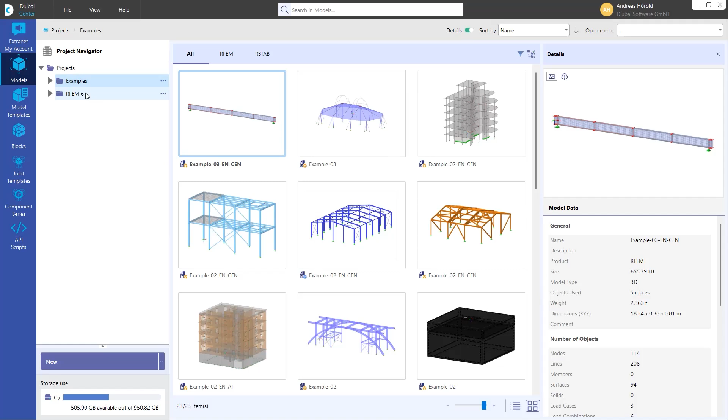Okay, let's start with the first question: how do I organize my projects? I can organize my projects in the Dlubal Center. People who already work with RFEM 6 know that. I would like to give you some tips and an overview of how you can work with the Dlubal Center, and news about what we've implemented in the Dlubal Center.

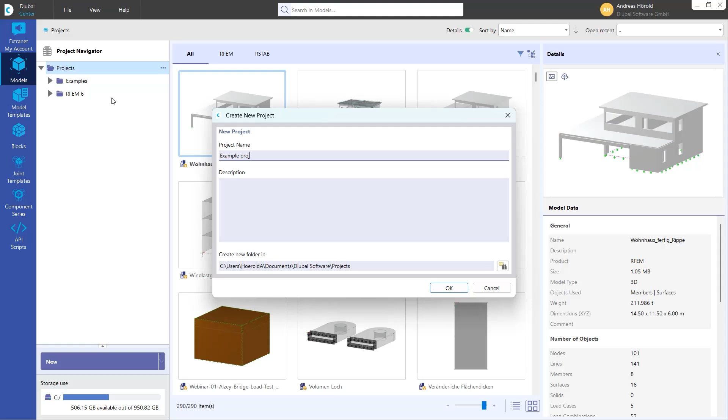Let's start with the models, the most important tool in the Dlubal Center to organize your projects. Let's create a new project with a right-click to Projects. I can create a new project, let's call it Example Project. Okay, that's the new project.

I would like to create a sub-project. Again, right-click to Example Project, then create new project, and the new project should be called Model House 1. I can add a description here if I want. Then, again a right-click to Model House, and I create a new file, RFEM model in that case, and I call it House Variant 1.

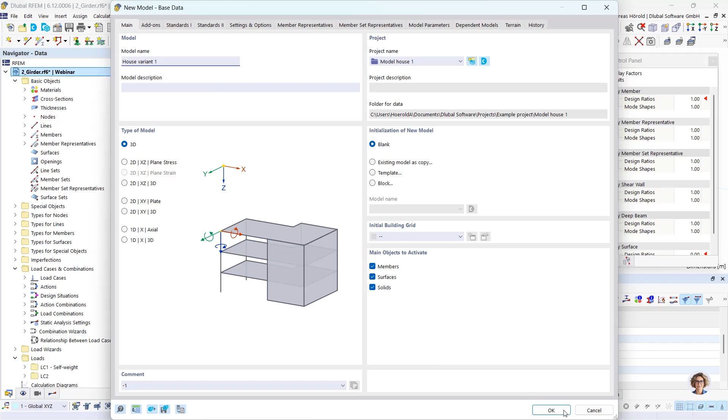Turn back to the Dlubal Center, then you can see the file here. If you switch to the list view, you can add different columns here, for example created in version, created by user, or I can remove them with a double click, and can add used add-ons, modified by company, or created by company, as you want. Different types are available. Now you can see the added columns here.

I can open, for example for the Example Project, with a right click the folder location, and the Windows Explorer was opened. I can create a new folder also here, so with a right click, new folder, and I call it Model House 2. I'll decrease it a little bit so we can see both.

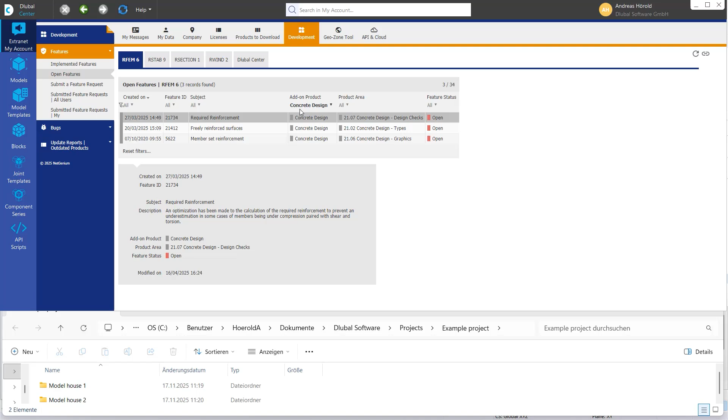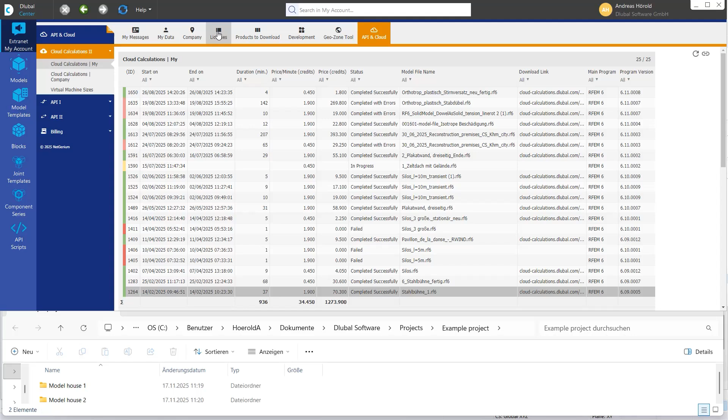Let's turn to the Extranet and My Account. You can see the extranet messages here, or what's quite important, the development - you can see implemented features in a certain add-on, for example, or select all to see all implemented features. You can see open features for certain products or all products, then submit a feature request which may be implemented in the future. You can see the GeoZone tool requests - those are my requests in the past - then the API and cloud, calculations from my side from the past. Then you can see here the data of you and of the company, your licenses, and so on.

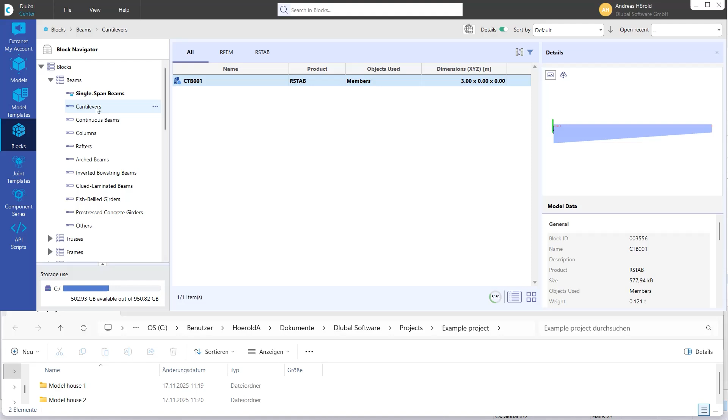Then we turn to models and templates. The model templates category in the Dlubal Center provides an overview of the models you've saved as template files - in my case it's empty. An important note: the Save as Template function in the File menu in RFEM allows you to save your current model as a template. Then you can see the blocks - those are parameterized, and most of the models have parameters implemented. Let's go to this view, the tiles.

Simple models and more complex models, for example curved surfaces and concrete structures - a lot of blocks are available. Just use them, that's quite easy to handle.

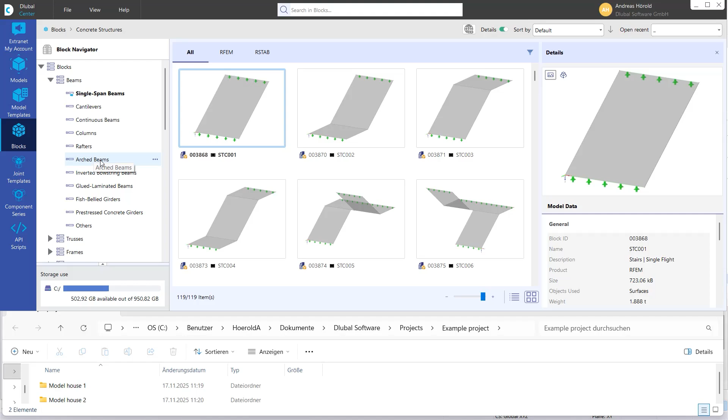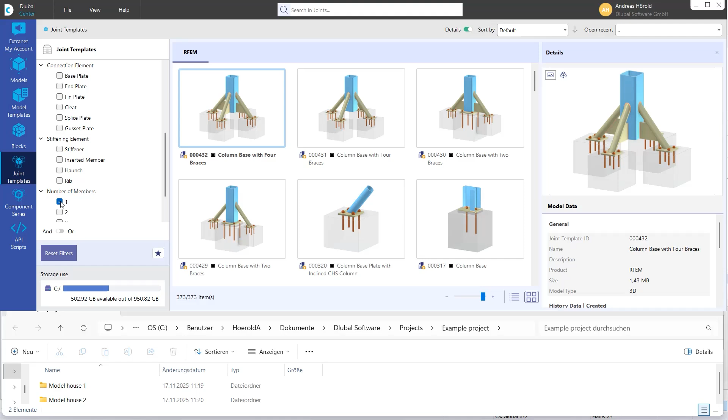Then the joint templates - you can select certain templates of joints. You can use it in the add-on, also in the steel joints add-on, for example also number of members, or joints with ribs, cleat, and so on.

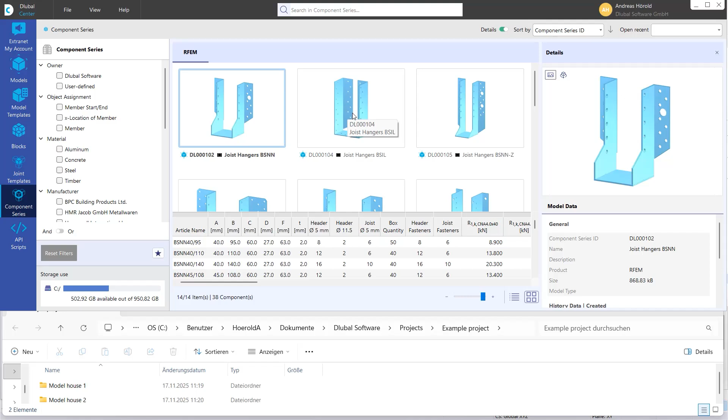Then that's a quite new part of the Dlubal Center, the component series. We are in development of the new add-on components. It's currently in alpha version, meaning it's in preparation, and in the future you can compare your internal forces with the maximum forces of the joint. And API scripts - there are already sample scripts that you can use for your project.

Okay, that should be all for this question. Let's turn back to RFEM.

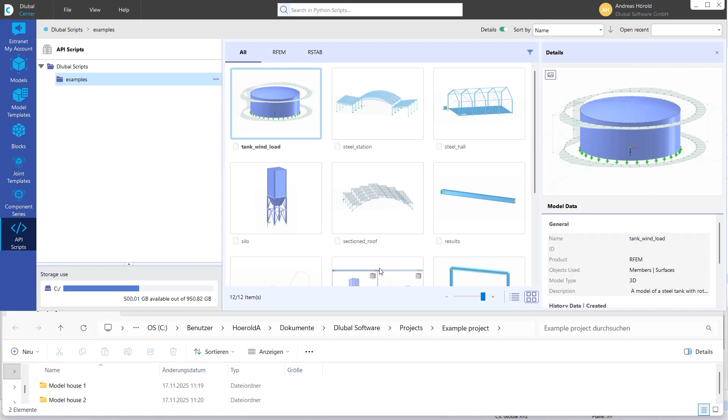The next question is, can I design longitudinal fillet welds according to Eurocode 3, Part 1-8 in RFEM 6? Yes, that's possible now. We'll soon release that feature, and I can show you how to do that.

I've prepared a simple single span beam made of a cross section HE 180A. Imagine you need to use a girder with a maximum height of 175 millimeters. It's not possible, as you can see on the design ratio, with the HE 180A, and it's also not possible with an HE 180B. That's why we create a welded cross section.

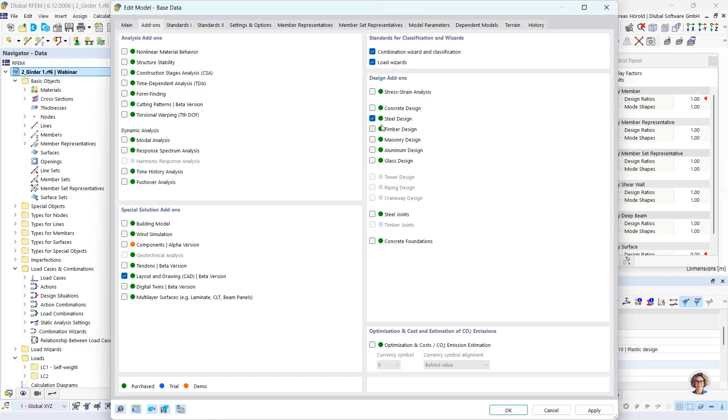At first, it's clear - I go back to the base data. It's necessary to activate the steel design for that feature. Then we create the welded section. I edit this used section. I turn to the library above and select thin-walled I section. Before I enter the geometry, I go back to the main section here and select welded.

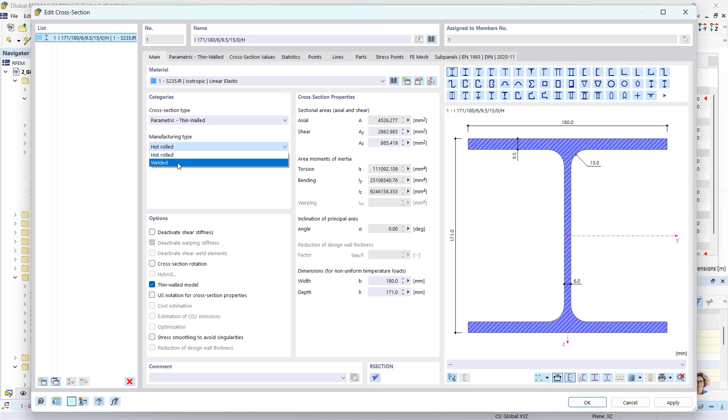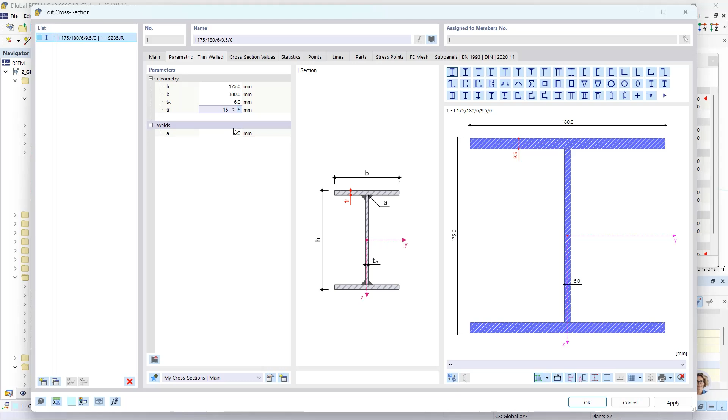Okay, then I enter the parameters. Maximum height should be 175 millimeters. Then the other values can remain, but not the thickness of the flange - should be 15 millimeters, and the weld should be 3 millimeters.

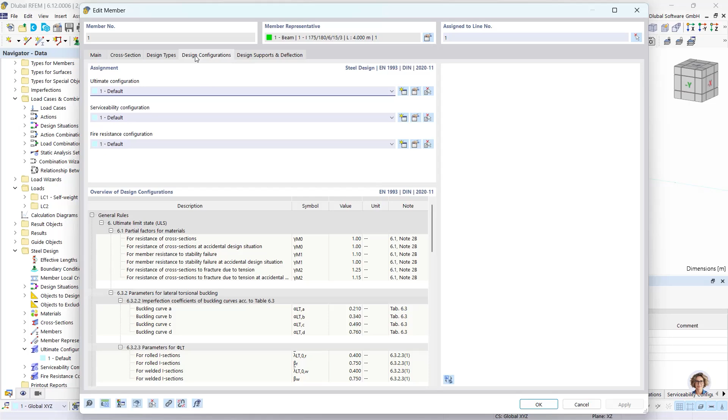Then I have to activate the weld design. I turn to the navigator data, then steel design and the ultimate configurations default. I can turn to that chapter also when I use a double click on the beam. Then the design properties are activated and I can find the design configuration here, and I can edit it also with that button.

So then I have to activate the design of the longitudinal fillet welds. The correlation factor should be determined according to the Eurocode. It's dependent on the material, and in our case it should be 0.8 because we have material S235. If you want, you can also use a user-defined correlation factor, but in most cases we will use the automatic data determination according to Eurocode.

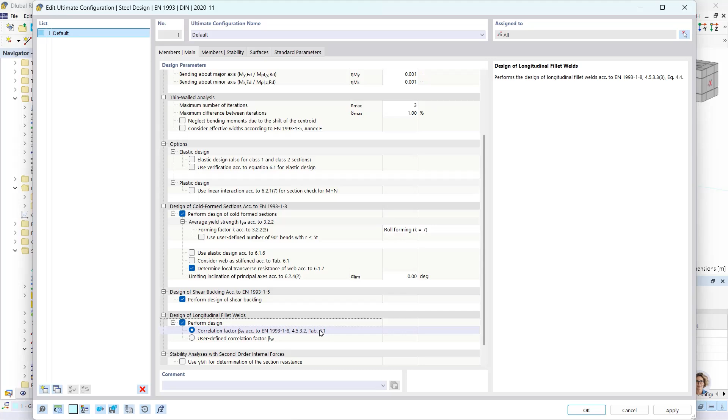Okay, so then I start the steel design again. So the combinations are calculated in parallel. Let's turn to the design ratios on members. Yeah, and you can see there's an error.

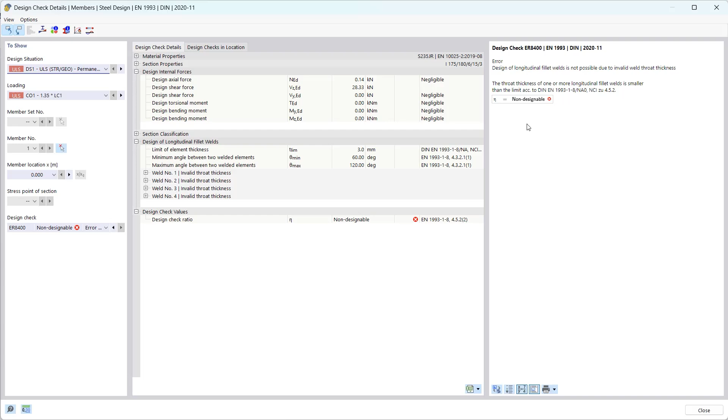If I double click on the line, the details are opened and you can see the throat thickness of one or more longitudinal fillet welds is smaller than the limit according to Eurocode 3. Now the program checks that automatically. In that case, the weld is too small, and we need to increase the weld.

So I turn back to the navigator data and I do a double click on the cross section and I increase the weld to 4 millimeters. Okay, then I run the steel design again.

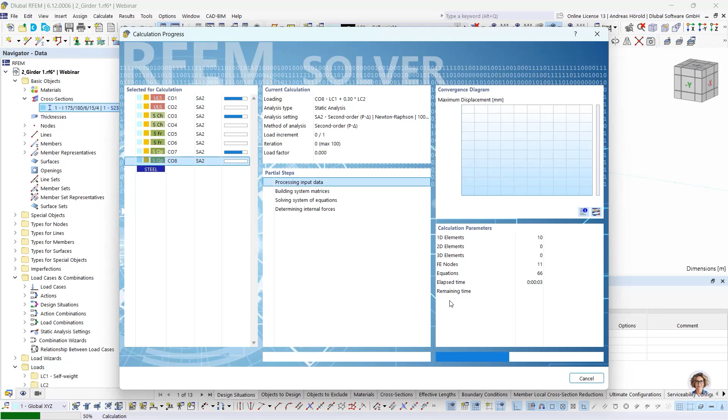So now the design of the weld is done. Double click on it and I can see the design checks - the 0.8 can be found here, the correlation factor, then the thickness of the weld, and the design check ratio is approximately 30%.

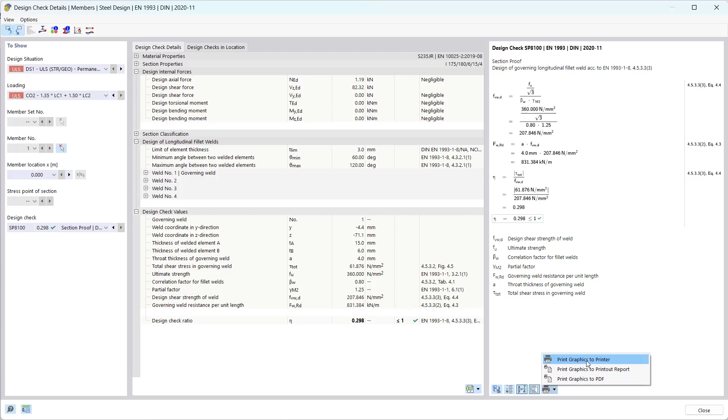And of course, you can also print the formulas and so on, on the printer or in the printout report. Okay, that should be all for this question and this model.

The next question is, how can I smooth results in RFEM 6? That's an often asked question. You can do that with a surface results adjustment.

In RFEM 5, we called it average region. Such a surface results adjustment describes an area in the model whose graphical results are not represented by the actual diagrams, but as mean values. You can use a user-defined adjustment area to evaluate the smoothed surface internal forces.

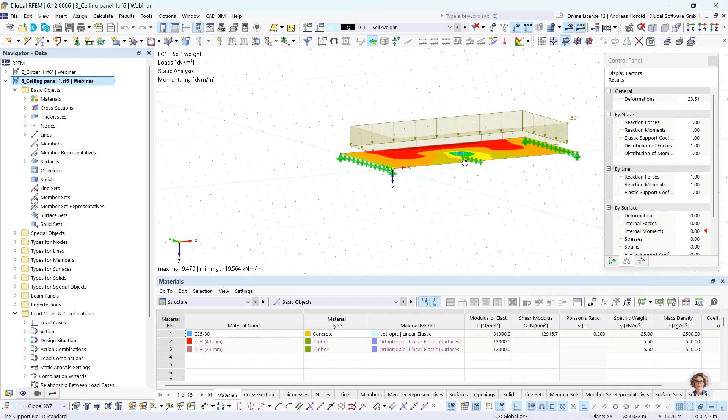You can see that ceiling panel here and a wall here. Imagine it has a thickness of 20 centimeters. And you can see there are singularities at the end of the wall here. So we would like to use such a surface results adjustment to smooth the results.

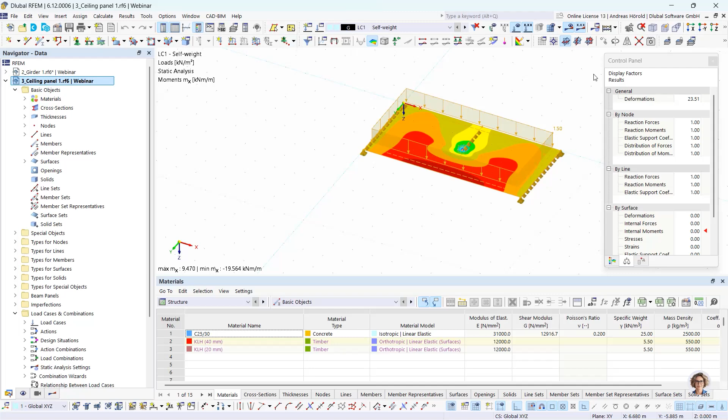So to compare the results, I copy that ceiling panel - select all, then I use the move and copy function, create a copy, 6 meters in Y direction, including loading. Okay.

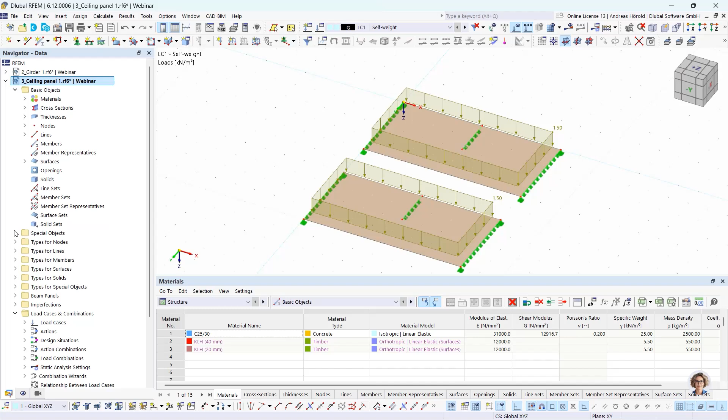So then I turn to the navigator data, and under special objects, you can find the surface results adjustment. You can also find it in the menu under insert, special objects, surface results adjustments, and I open the dialog box.

At first, I have to assign a surface. Then you can select different shapes here: rectangle, circle, ellipse, and polygon. I use rectangle. The dimensions in our case should be 20 by 20 centimeters. And I select the node. To define the position correctly, I move it to 10 centimeters to depict the wall end correctly. Then there are different adjustment types.

The default setting is for the direction u, averaging of my, mxy, and so on, for basic internal forces in surface direction y. The second line here is the default setting for basic internal forces in surface direction x.

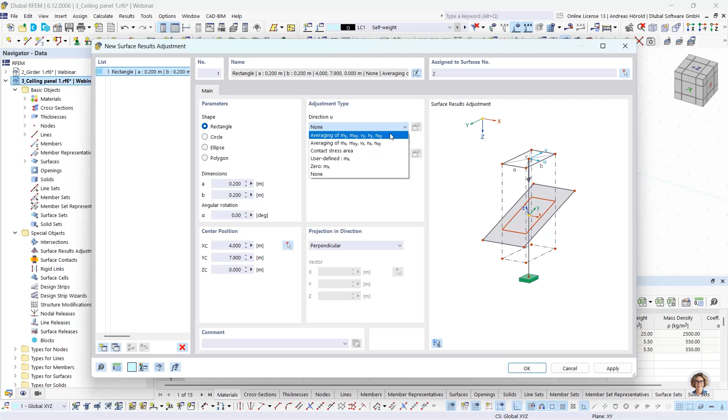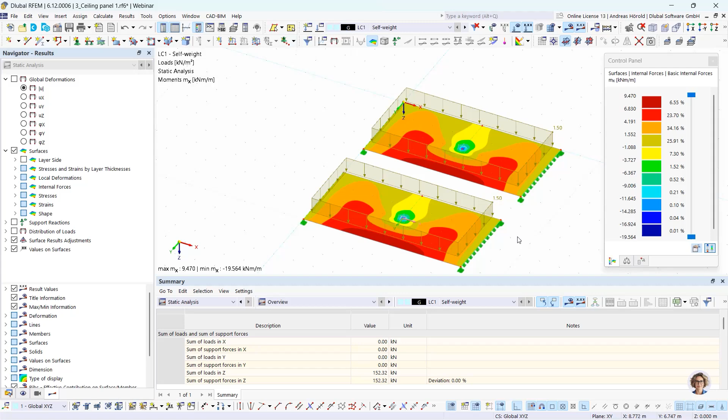If I want to see what the maximum value is here, I can deselect that slab and hide selected objects. Now the maximum value is minus 16. That's the possibility to smooth results in RFEM 6.

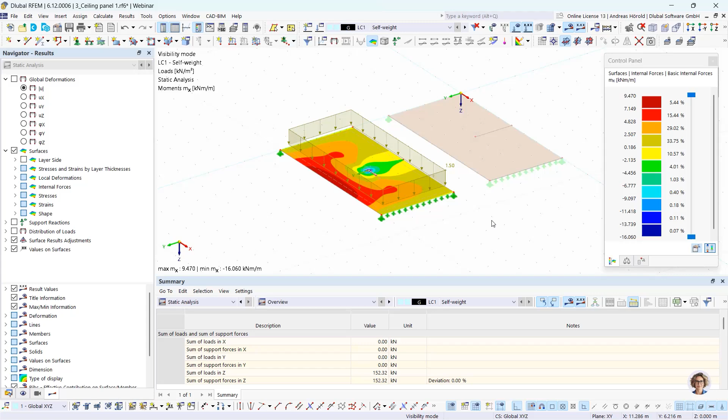The next question is, where can I find specific wind settings in RFEM 6.12 and later? As you have maybe already realized, we changed the GUI in RFEM 6 a bit to be able to hand over more data to RWIND with the GUI in RFEM 6 without stepping directly into RWIND. Let's start with the basics.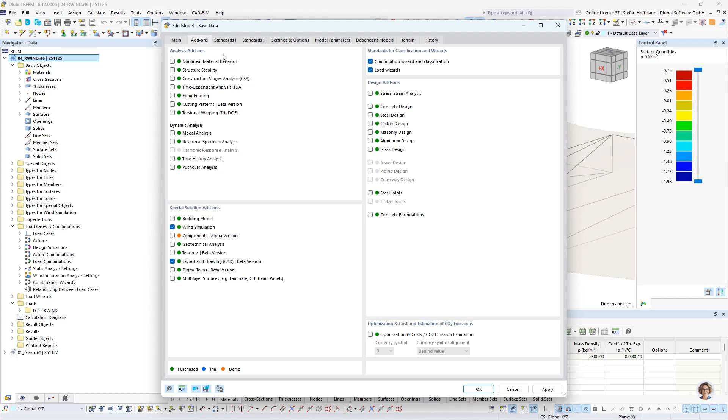Usually at first you activate the add-on wind simulation, and you can choose the standard group for your wind profile in order to determine your automatic wind profile for your region.

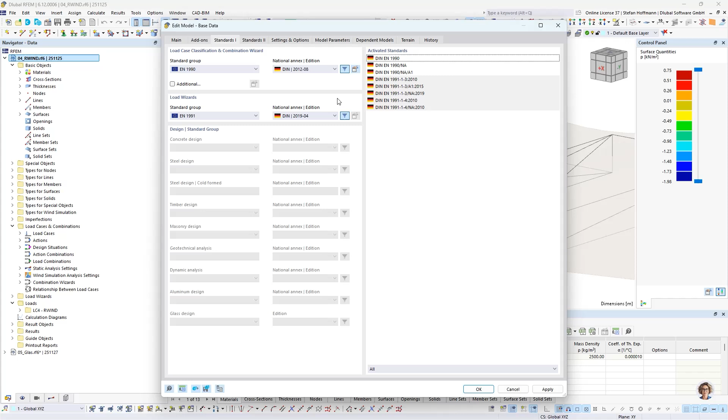If you're already interested in adding a terrain to represent your location specific behavior of the wind, maybe by trees or some mountains, you can already activate a terrain in the base data terrain settings. You can choose between no terrain, a horizontal plane, an inclined plane, some table values, or, as I am using, and this is most likely also the first change, an IFC file model objects.

So this is no more found in the mesh settings to adjust the IFC as a terrain. You already input it as the base data in the tab of terrain. So I'm simply using an IFC file where I've modeled a simple shape of my terrain, and you can do some more inputs on the size of your terrain already here.

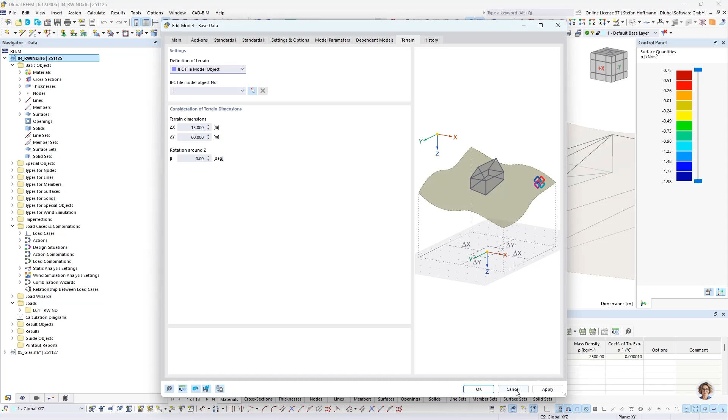So if we jump into the model, you already know that in the mesh settings you have a tab of wind simulation, and for the regular customers, you'll already realize that this tab has changed a lot from the GUI. We moved some parts, and you now have the option to assign objects from shrink wrapping. So the shrink wrapping mesh, which is later necessary for the calculation in RWIND, in order to be assigned to your main structure or surrounding objects. So you can already split it over here, but later on also in the objects.

This is currently not in use. You can as well choose to activate the terrain, which we set in the base data to be considered for the calculation. You can also jump into the base data. You can, moreover, as already known, adjust the level of details for your members. You can choose to close hollow sections. You can consider a surface thickness in general already, and the two known options to keep RWIND results if the mesh is deleted, and/or to run RWIND in silent mode.

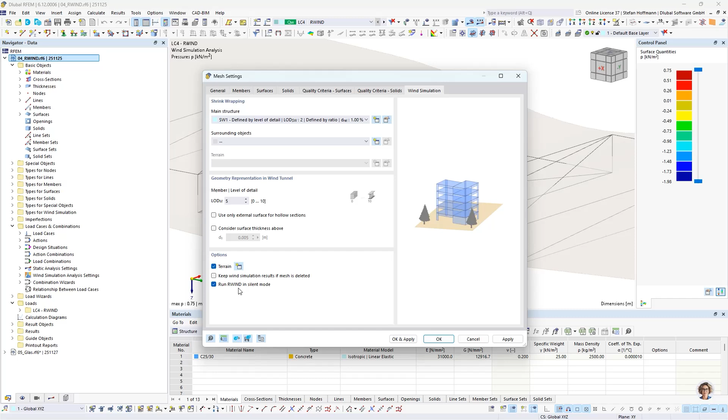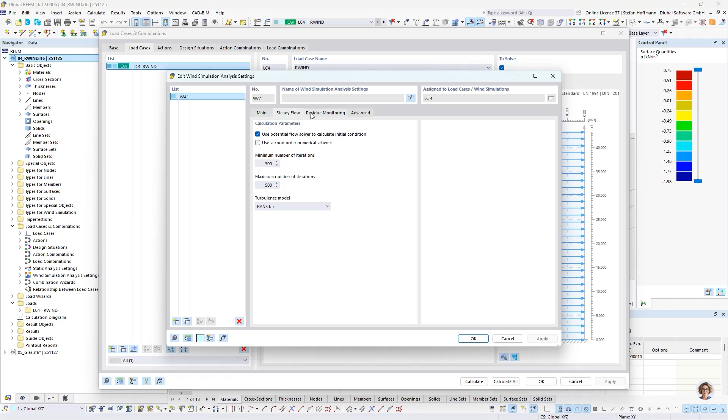As known, you also have settings in the load cases from the analysis type wind simulation. So if we jump into the tab, this has not changed a lot, I think. You can assign wind simulation analysis settings, where you can, for example, differ between steady flow and transient flow. You can hit some more options to be handed over to RWIND. You can also step into the tabs to add some more input for the wind tunnel.

The wind profile did not change from my point of view, so you can simply assign a wind profile according to a standard and hand this over to RWIND directly. Some more checkboxes at the bottom. Everything is usually explained in more detail in our online manual.

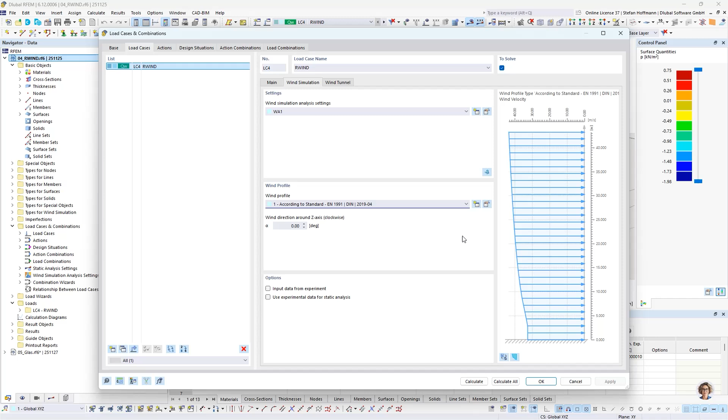The biggest change, in contrast to the mesh settings, is now that every object, if you click on it, has a specific wind simulation setting for each surface, which you can activate. And if you see this tab, you can see that you can now assign different shrink wrapping settings for surfaces.

So if you have maybe a small surface, you can assign an even finer mesh later on because you are interested maybe in facade engineering and some results on this point. And if you have a bigger surface, which is not of most interest, you can assign a coarser mesh.

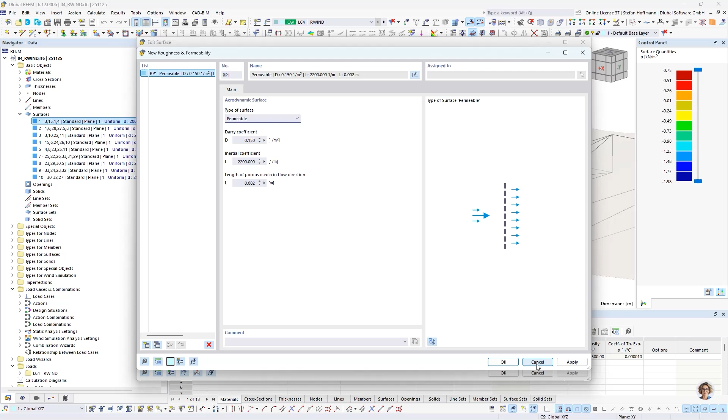You can also define the roughness and permeability as an object. So as you are maybe used to already in RWIND, you can use a closed surface and enter some permeable options for it, so that the mesh will not be fine, but it will be considered as permeability later on. You can also check to consider surface thickness above, and another interesting option is that you can simply also exclude this object from the wind tunnel.

What we did not change is that you have, of course, your wind simulation analysis results, and you can still split to show it on the original model and/or the computational model.

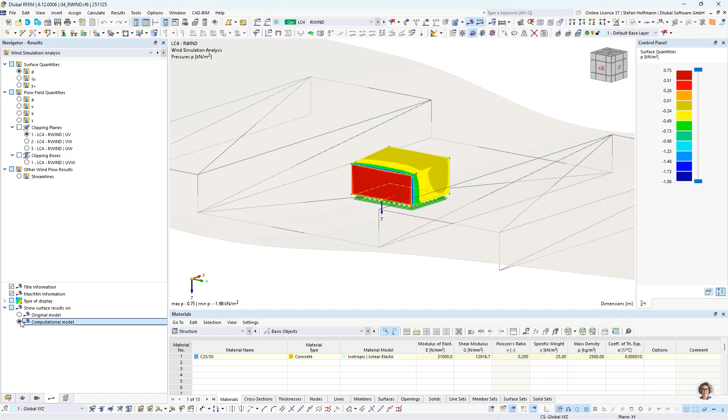The next question is, can I control the shear coupling for laminated glass in RFEM 6? Usually, having laminated glass, the shear coupling is quite of interest, because if you have a layered pane with two panels of glass and one foil in the middle, one worst case is that you do not take the shear coupling into account, having big deformations and stresses only in the glass planes. But it might also be of interest, that is why we use laminated glass, that you can take into consideration the shear coupling.

Sometimes you are allowed to do this, and with regards to the German standard DIN 18008-1, it offers two requirements in chapter 7.2.1. It mentions that when determining the stress and deformation of laminated glass and laminated safety glass, favorable shear coupling between the individual panes must not be assumed. But in the next chapter, 7.2.2, in the case of an unfavorable shear coupling, e.g. in the case of restrained stresses, full shear coupling must be assumed.

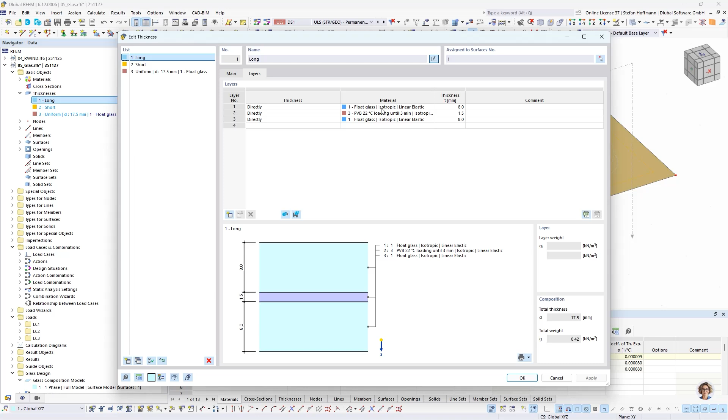First, a quick look at our model. It's a glass pane with 4 point supports, and I have created a thickness from the type glass composition. I have 3 layers: 2 times float glass, 8 millimeters, and 1 foil in the middle. You can use the foil with material values from our material library. I'm using a foil with a load under 3 minutes, so the E modulus will already change for our foil layer. This is my glass composition.

For the calculation, you have to assign, or this is usually automatically assigned, the first glass composition model, where you can later on also choose a solid model, where you can then take into account isolated glazing. But currently you can differ between coupled and uncoupled shear coupling between the glass layers. I have defined uncoupled, so there is no shear coupling in my main model.

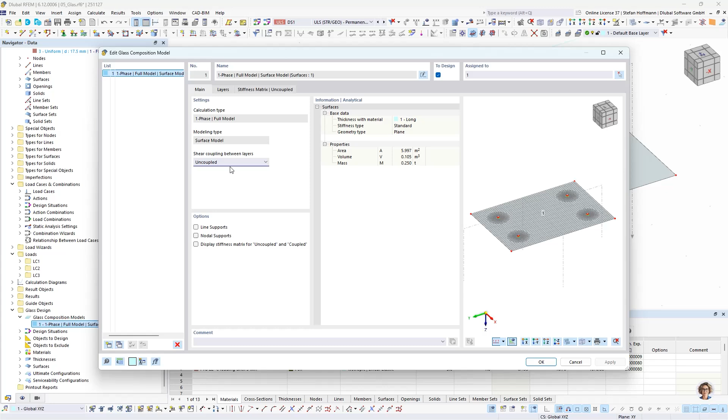So how to use or how to consider both shear couplings? It's quite easy in RFEM 6. We do this by checking our design situations. Once you check glass design, you can see a further added option at the bottom in the design situations. It mentions inverse shear coupling between layers for surfaces with glass compositions.

Let's remember, we have a glass composition model without shear coupling. So for every load combination in design situation 1, if we do not check this checkbox, this is uncoupled. We can simply copy this design situation and check this checkbox for the same load combinations, where we will then take into consideration the full shear coupling. Just by simply adding this option, load combinations will be calculated automatically.

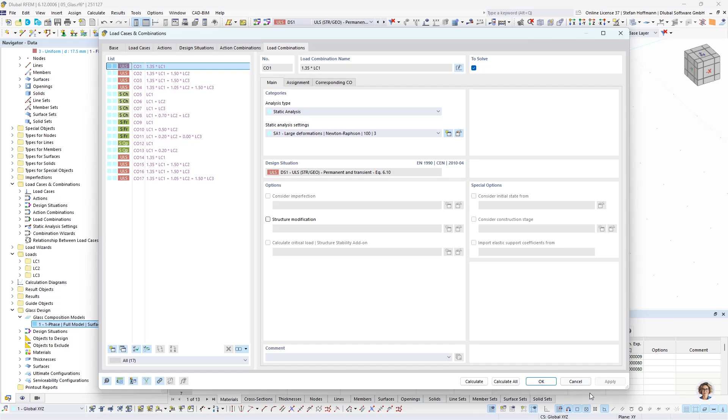So once we step quickly into our design situation 1, no shear coupling, we have a maximum deformation of approximately 50 millimeters. And if we step into the one with full shear coupling, the deformation, of course, reduces as expected, related to the theory behind our 2D sub-stiffness.

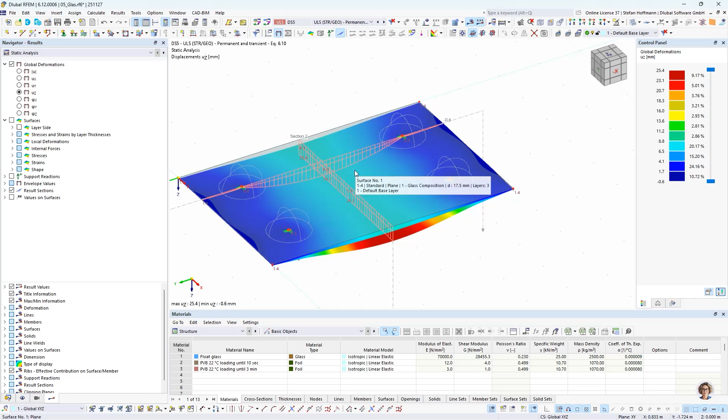I think the most interesting part is, of course, then later on the glass design. I have done 2 sections through the model, and we are, of course, above our design ratio, so we would have to adjust our model. But mainly, not taking into consideration the shear coupling, we would expect on point supports to have the biggest ratio in the middle of the field, but this would decrease once we can take into consideration the shear coupling.

This affects usually, most likely, our support points with the point supports, that the stress ratio may increase. So it's not only in the case of restrained stresses, but from my understanding and experience, you can also expect that the stresses may increase with a full shear coupling at the place of point supports. You can take this into consideration by simply activating this option in the design situation.

Let's step to the last question for today. We will stay in the model. And the last question is, my mouse is not working as usually. What can I do? Let's reflect the mouse function.

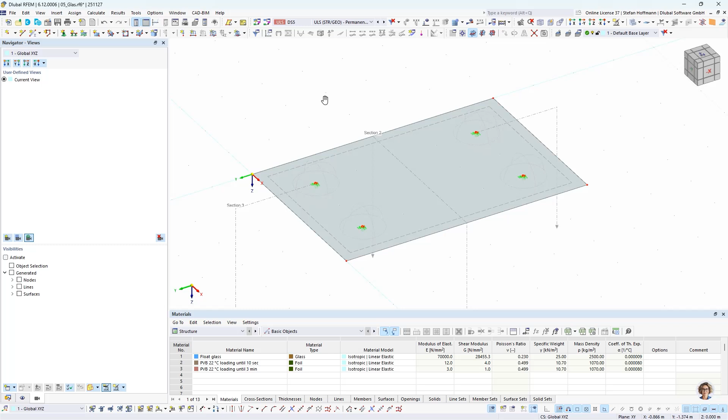With the left mouse, you can select items. With the mouse wheel, pressing it down, you can pan. With the right mouse, you usually get a context menu with some options. If you hit Control on the keyboard and press the middle mouse button, then you can rotate. If you select a node or object before and hit the Alt key and press the middle mouse button, you can rotate around that object. And well, you can move, of course, with the middle mouse.

And what happens if you only have a mouse with one key, or if you are sitting at your laptop where you do not have a middle mouse button? We introduced this option over here to move, zoom, rotate. And if you activate this, the mouse action will change.

So with the left mouse clicking, you can move. With holding Shift, you can zoom by moving the mouse and clicking the left mouse button. And of course, with Control or Alt, you can rotate by just simply clicking the left mouse button.

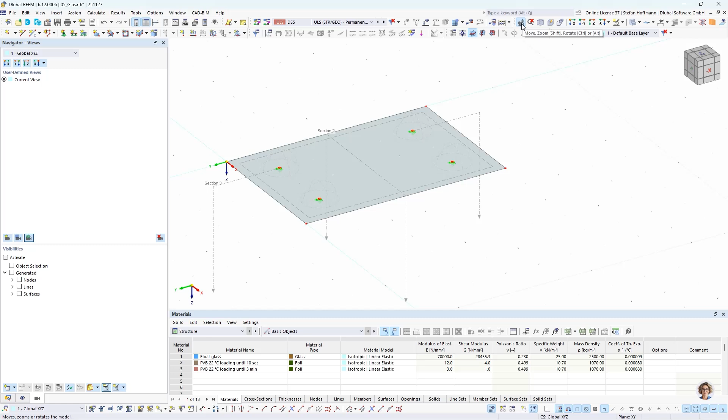So if you maybe cannot use, or you think you would like to select something and it's not working, then just simply remember that this option might be active, and it also affects the view cube, so it's not fully functioning anymore. So if you are a bit confused, remember this option, uncheck it, and then you have your normal mouse options back again.

What I would like to add is the function over here to add something to the selection or create a new selection. So usually you can mark the surface, hit the Control key, and add up some more objects into the selection. But if you are tired and do not want to do this, you can check this box, this button, and click items, objects one after each other.

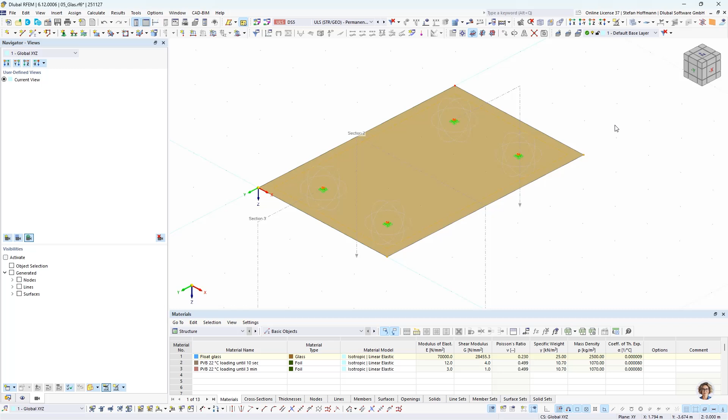But this may face some trouble if you do not remember you activated it, because then a left click will not undo the selection. You have to press Escape.

The last two buttons I would like to add to this topic are these two. Both allow you to interact with the model and the table. So as we had in the glass design, if you have results and you click in one row, you will see a red arrow pointing at the place. If this is not the case, or if you click on one node and it is not highlighted in the table, then simply remember both buttons, and they should be the reason why it is not highlighted, vice versa.

All right, so that's enough from me. Thank you for your attention, and I will now hand back to Andreas.